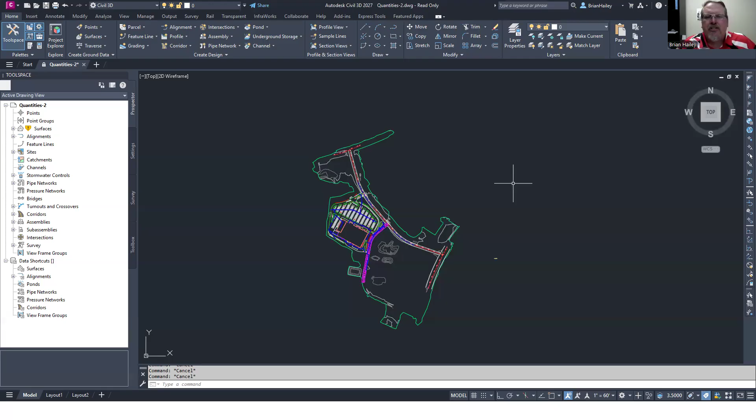Very nice. All right, so while we're waiting for the flood of questions to come in that you all have been thinking about over the last month that you wanted to ask me about, I always like to show off something new. So what I thought I would talk about today is double-click actions within AutoCAD. Now, this is an AutoCAD feature, but it works fantastic for Civil 3D.

Right now, there are certain objects that, most objects, if you double click on an object - so if I double click on the surface here, you'll notice it brings up just the AutoCAD properties. Well, most people that are using CAD all day long, every day, have their properties up on the second monitor or anchored somewhere. You don't need to bring up your properties all the time. I would much rather have it do something else.

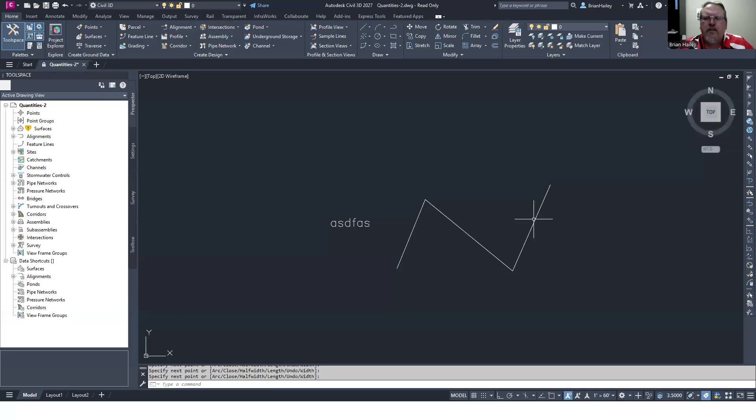And so some examples: if I put a piece of text in here, that's a small piece of text, all right, just whatever. If I double click this, it doesn't bring up the properties - what does it do? It brings up the text editor. Same thing, if you double click a block, it'll bring up the block editor. If the block has attributes, it'll bring up the enhanced attribute editor. This one a lot of people don't know: if you double click a polyline, it brings up the polyline edit command. So double clicking has different commands that get run depending upon the object that you double click.

And so what I want is when I double click on this surface, rather than bringing up the AutoCAD properties, I want it to run some other command. The one that I want it to do is bring up the surface properties. And the way this is done is by adding a double click action into your CUI. So I just type CUI at the command line - that's customized user interface, if anybody doesn't know.

And in your CUI, you have a double click action. So you can see right here, I've got all these double click actions. So right now, I don't have any double click actions. Now, this is the civil CUI file, and I do not recommend making changes to the civil CUI file, because when 28 comes out, it's going to have a new CUI file, and then you have to go in and add all your double click actions again.

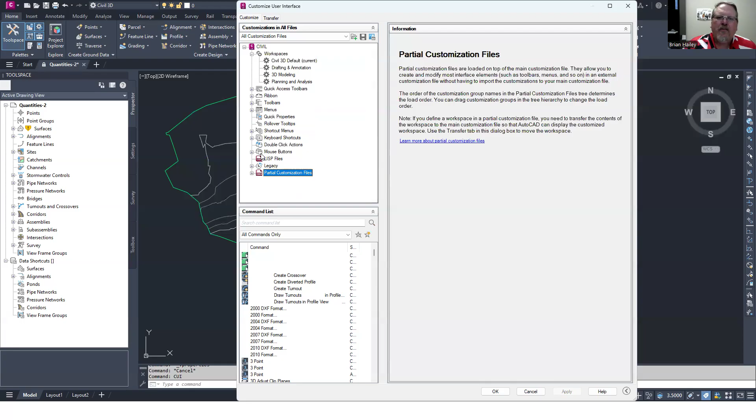Instead, what I recommend is creating a partial customization file and adding all of your personal stuff into that partial customization file. So if I right click on here, I can load a customization file. But for this, I'm just going to go ahead and edit the base one here. So if I right click on here, I can create a new double click action.

And basically the way this works is this is now a command, right? I'll just call this surface. So when I double click a surface, what do I want to have happen? Now, this is just something I can drag a command to. So I can take any command from down here and drag it to here. So I can come in here and find surface properties. I can take this, and I'll give you a tip.

If your list here is long, when you simply drag it up, as soon as you hit the edge of this box, it's going to start scrolling, which is really, really annoying. So a trick to avoid that is when you drag it out here to the side, come up, and then back over. And so now you can see this double click action for surface is set to surface properties.

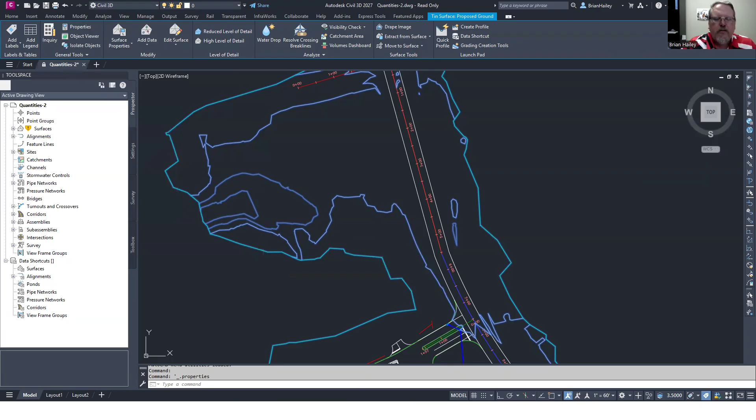So when I select OK, and I double click on the surface, what's going to happen? Yeah, it just brings up the AutoCAD properties. What the hell? Well, just because I named the double click action surface, it didn't know that it was going to be acting on a surface. If I go back in my CUI here, double click actions, surface. The object name is what you need to put in here.

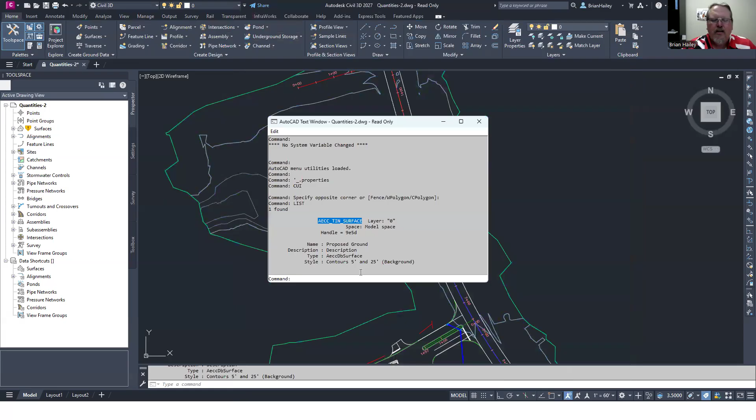So you need to figure out the name of the object to be able to run something. So how do I find this out? Let me just list it. I'm going to select a surface in my drawing, and I will list it. And as you can see right here, it says AECC TIN surface. I'm just going to copy it, go back into my CUI, double click actions for surface, and paste that in right there.

So that is the object: when I double click this object, I want to run this command. All right, so now when I double click my surface, it brings up my surface properties. Another good one is general notes. So if I go over here to annotate and I add in a general note, oops.

Most of the time, these general notes need to be edited. So how do we do that? Well, you select it, you right click, you edit label text, and then you're editing the label text. Well, you can do the same thing here. So let me list this. This is an AECC general note label. Copy that. CUI. Double click actions. New double click action. I'll call this one general note. Paste the object name in there.

Go find my edit. What is the name of that command? I can't remember the name of the command off the top of my head. Anybody know what that is? Maybe in this? No. Edit label text. There it is. Brian, you found it. Yeah, Chuck had typed it in.

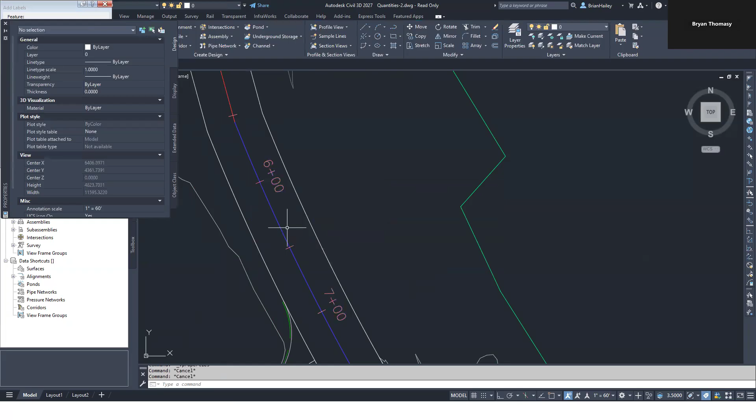But that would be a different command if it was, say, a manhole label. That would be a completely different portion. Right. So if I double click, for example, on this alignment label, it just brings up the AutoCAD properties. If you want it to bring up the edit label group, right?

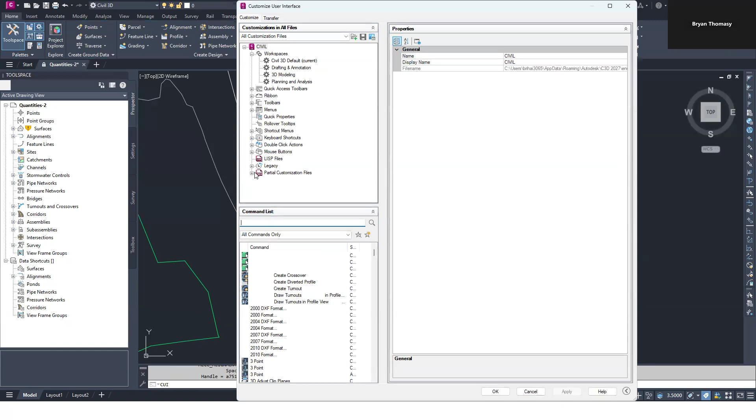So again, I'll select this, list it. Copy that. CUI. Double click actions, new double click action. This will be alignment station. Paste that sucker in. This one is add edit. No.

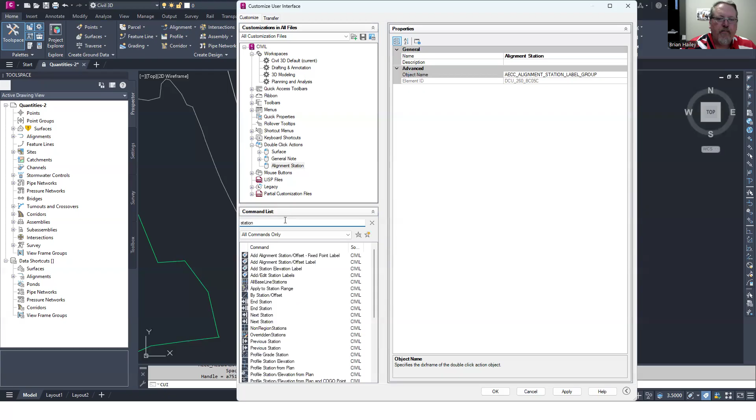It's something with station. Add edit station labels. That was the one. Drag that in there. Select OK. And now when I double click one of these labels, so I'll just double click this little tick here, it brings up the properties. Brian, shouldn't that have brought up the other thing?

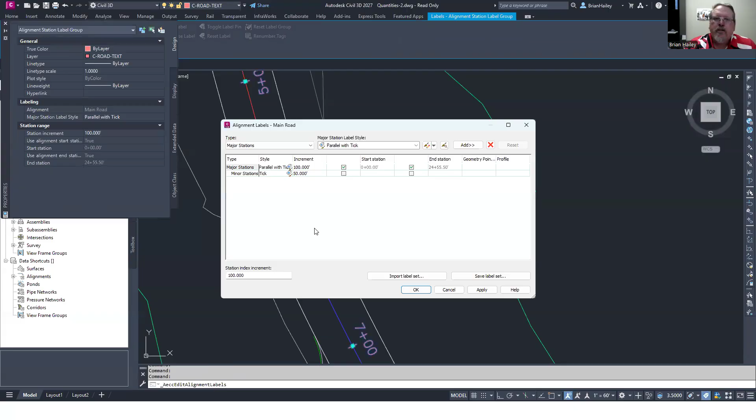Well, what happens if I double click this label? It does bring up the alignment labels, right? So what's the difference? Well, this is a major, this is a minor. So if I list this, you'll see this has minor station in the name. So if you're doing this for alignment and profile labels, you've got to figure out all the different types of labels that can be added to that and add those double click commands to all of them.

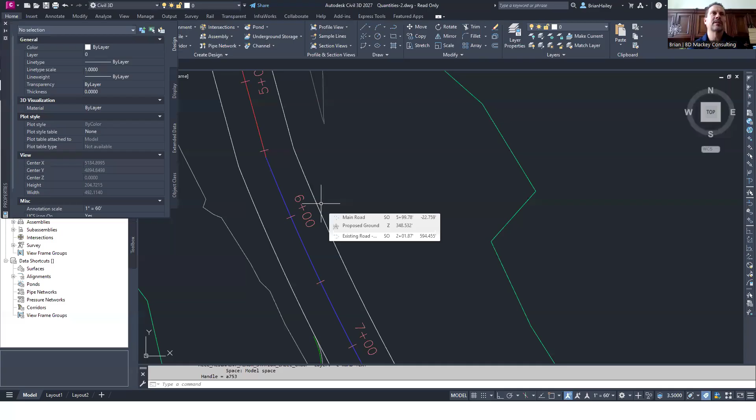So while you're in there, Robert asked a question, how does one make the edit label text box have readable text? Oh, yeah, that's a good one, right? Where's my general note? There it is. Readable text. Use Arial. Yeah. Well, first of all, don't use an SHX font, use a TrueType font. That's your first given. The other one is there's a Windows setting called

God, I haven't done this in years since we always use Arial. It's the, I can't even think of the name of it now. ClearType, thank you. I was gonna say Chuck put in ClearType. Yep. So if you come in here and you adjust the ClearType text, so you just go to Windows, type ClearType, adjust ClearType text.

Wow, this is different. Adjust ClearType text, and then turn off ClearType, and then just next, because it doesn't matter. We'll turn all of our monitors, sure. And since we turned it off, it doesn't matter which one looks best. And now you can see that's much easier to read. So it's something with the Windows ClearType that causes this issue.

But yeah, that's an annoying one. And now it's doing it for all my other monitors. There we go. Voila. Beautiful. Well, you do have some questions if you want to get into them. I'm going to do one more thing real quick.

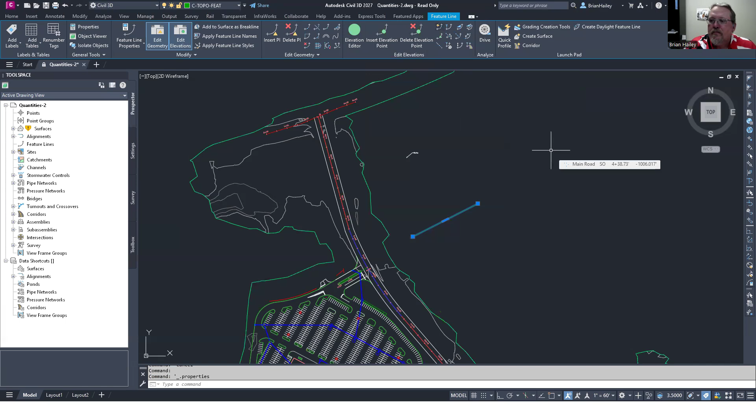Now you just need a triple click option so you could have either or. I think you could do a shift double click, right? Or something like that, maybe? You don't think so? I don't know. It just deselects it twice.

I know that there's like shift M commands and things like that or overrides. Man, Brian, are you going back to the old digitizer and the puck where the puck could have shift commands on the puck buttons? Well, to be honest, I'm on ACC so much, and the fact that they're archiving anything that's like Revit 2023 and below, you can't even put them on ACC anymore. I've threatened to go back to Bentley products.

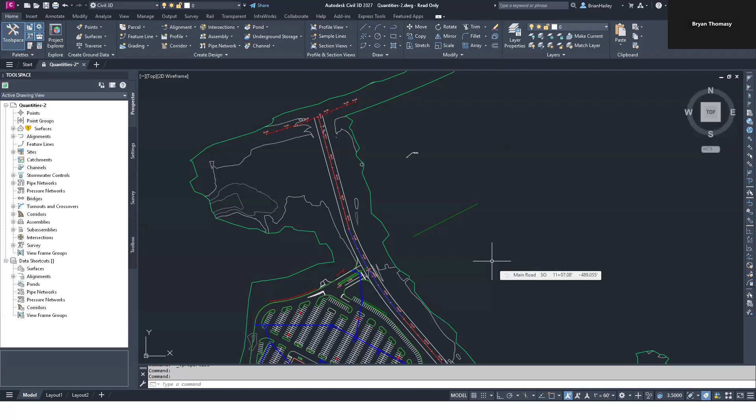And Chuck did ask, and being that you said you set up your company, I'm assuming this is a yes. Can the customization be added to the enterprise CUI? Yes. Yeah, and that's what I did. Here, let me come over to 2026. This is our GEI setup. So if I go into the CUI file here,

it's not the enterprise CUI, it's a partial customization file that's loaded into the CUI. So we've got our GEI menu here. And in here, I have all these double click actions. So these are the actions that I just put in recently. So if anybody wants to take a screenshot of those.

And these all bring up the properties of whatever object it is, except for the profile and alignment labels. That brings up the label editor, the label group stuff. And then the general note brings up the edit label text, and a feature line brings up the elevation editor.

Can you just export out the double click actions of that custom CUI so you could import it somewhere else? Not that I'm aware of. Just curious, wasn't a question anybody asked, just curiosity for me.

You could create a double click action CUI file, and the only thing you put in there are your double click actions. I do that with my function buttons too, they're preset to OSNAPs, overwriting F1, F3, F4, F5 and so on for snaps. That can be loaded separately, so that's all that exists in that CUI.

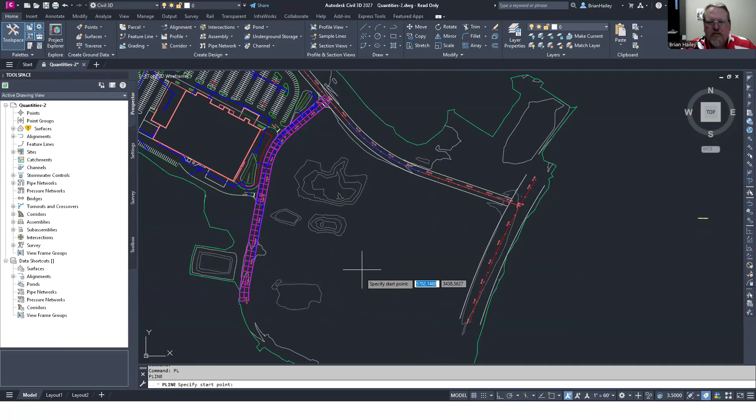So the easiest way to do that would just be stage storage. And make your contours like a tenth increment. So now if we come in here and do a stepped offset on this, let's set this to an elevation, we'll set it to 100 just because, and then we'll do a stepped offset on this.

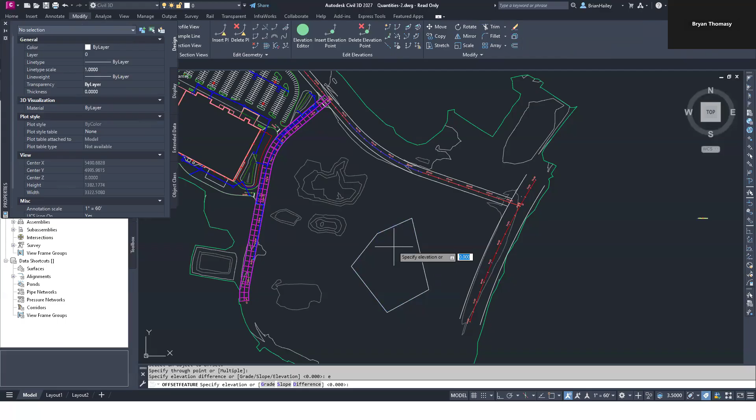Whoa, whoa, whoa, you're in Colorado, be careful. This data set's not in Colorado. Okay, see, we'll go through. I want the bottom of the pond to be about here, center of the pond, elevation of 85. All right, so super simple pond, right?

I need to turn that clear type back on, this is annoying. Give me just a moment, folks. All right, that's better, so let's go ahead.

Add these as break lines. Bada bing, bada boom, we have a nice surface here.

So there is a tool for this, where's that? It's under the Analyze tab, I believe, in the design pull down. And then under the design pull down, there we go: stage storage. This gives you the ability to create a stage storage calculation.

Basically, does it do an average end area or does it do the conic method? I can't remember, I think it does both, you get to choose. But I think it defaults to average. It defaults to both actually. Yeah, that's right, forgot about that.

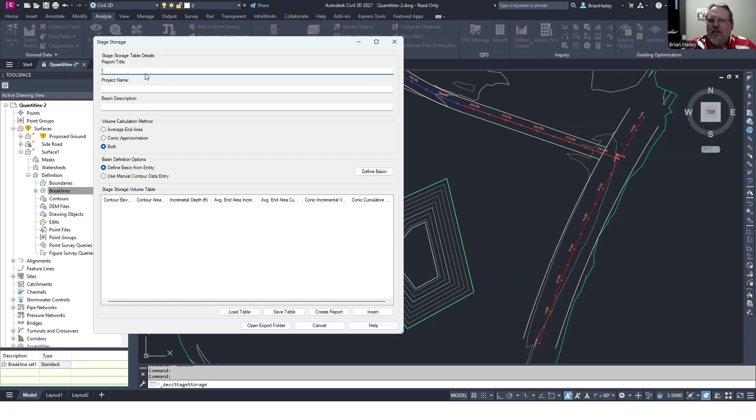I haven't played around with this in years, but I believe at least in older versions you had to put something in for the report title, project name, basin description, or sometimes it wouldn't work. I'm just going to throw something in there. I've never had to in the past. And before I'll extract the feature, I'll extract the contours first so I don't leave it up to the program, but I believe you can do it through here as well.

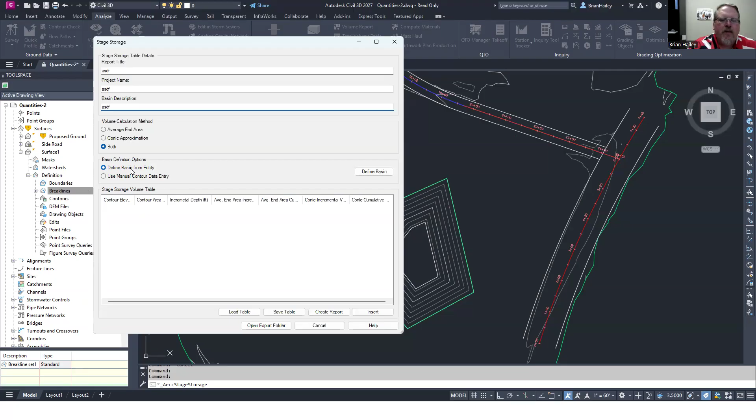So I'm going to define basin from entity, I'll choose define basin, and I'm going to define the basin from surface contours. Now as Brian said, if you extract your contours, you could define the basins from polylines. If you haven't extracted them, this will allow you to extract them right away, and it'll allow you to change the selected entities to the following layer, and put whatever you want in front of the layer for the polylines it extracted, and then you can have it delete the unselected entities on selected layers.

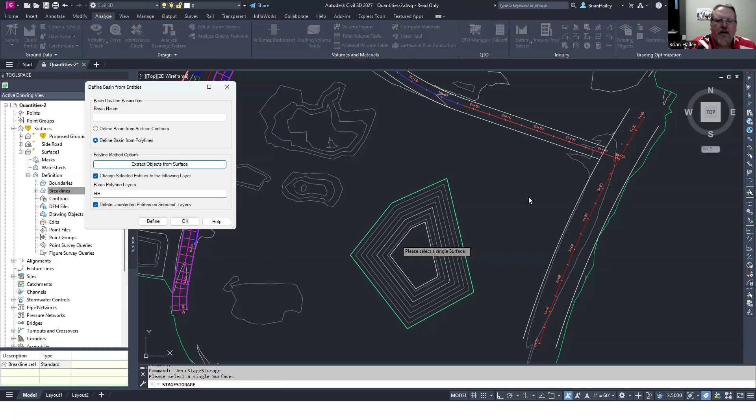So I'm going to go through this: I'll choose extract objects from surface, select the surface, and that just extracted all those contours. Then I'll choose define, and I'm just going to choose these here because I don't want to go all the way up to the top. All right, and it shows all this wonderful content down here.

And then you can take this, put it into Excel, do a calculation to find out at this particular volume I need, it's going to be at this elevation. There's nothing really automated in Civil 3D, at least not that I'm aware of, but I do want to show you this here real quick.

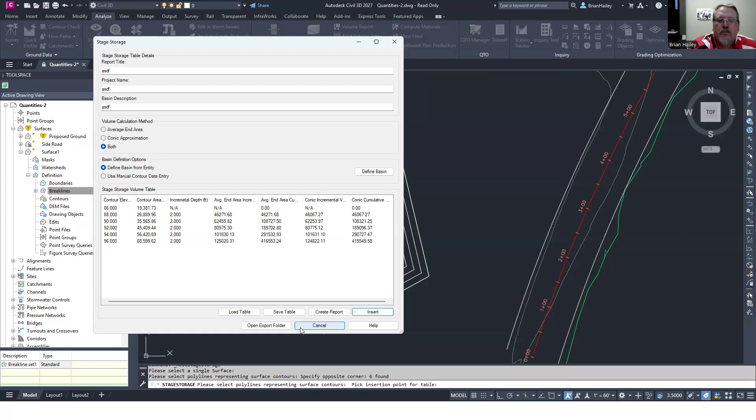So you can then load the table, save it, create a report, or insert it. If I choose insert, it'll insert it into the drawing for me. This is just an AutoCAD table, not dynamic in any way, but the data's there.

Remember I toggled on that option to delete the unselected objects, like that one and that one? It didn't delete them. So that didn't work. And remember when I said it's going to put the prefix on the layer name? It just used the prefix, it didn't actually use it as a prefix. So it did exactly what you asked it to do.

But that's one way of doing it - oh, I don't want to delete that, let me just get rid of you. There we go. So this is how you can go about doing that, Robert.

The other thing you could do is, if you really wanted to, create a level surface and then do a volume comparison between the volume of your pond and the level surface, and move that up and down until you get to a specific volume that you need, then find out what the elevation of that is. But I think this might be a little bit easier.

We'll use both, but for the stage storage to show the freeboard and everything like that, that's one of the easier ways to do it. That way you can go all the way to the top of the pond and see what it is with various freeboard.

Hopefully that answered your question, Robert. Sort of - do you want to come off mute and ask a little bit better? You can do that if you like. Do I have to do that for you? I just did it. Thank you. So if you'd like to, yeah, we can hear you.

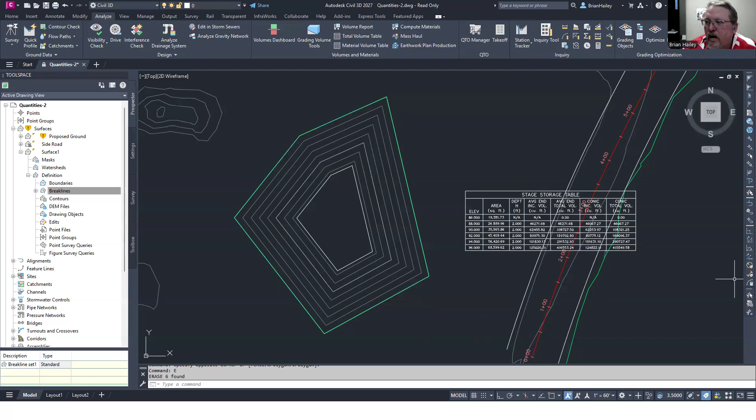My users - we have, like I said, the existing TIN surface with a depression area for a pond that's way larger than what they need. And they wanted to know at 2 acre feet, what was the elevation going to be? So I'm kind of curious about Max's comment there - make a pond from the surface and then use that pond for volumes.

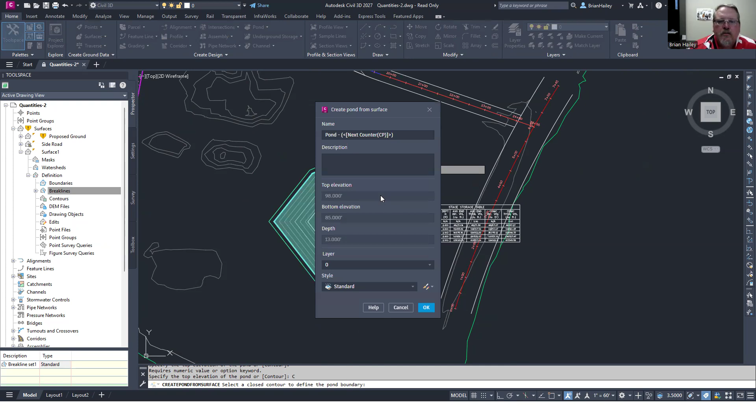I wonder if there's something in the new pond tools. Let's go to pond, create pond from surface. Let's choose contour - so that's the top of the pond there. Okay, so we have a pond.

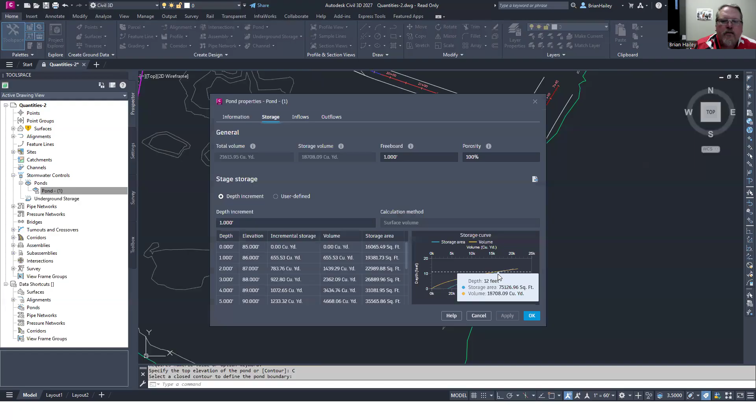It's gotta be over here somewhere - stormwater controls, ponds, properties. Is there anything? Storage. So we've got a chart over here. Can we make this bigger? There we go. So this actually is a lot easier.

And then you can come over here and say, okay, at this - so we've got volume, we got storage area. Unfortunately it doesn't let us go across the volume, but it's the same concept. It's not going to give you the elevation at a specific volume - you'll just have to do an interpolation between two different elevations or volumes, and then it'll tell you what the elevation is between them. Yeah, very much, okay, thank you.

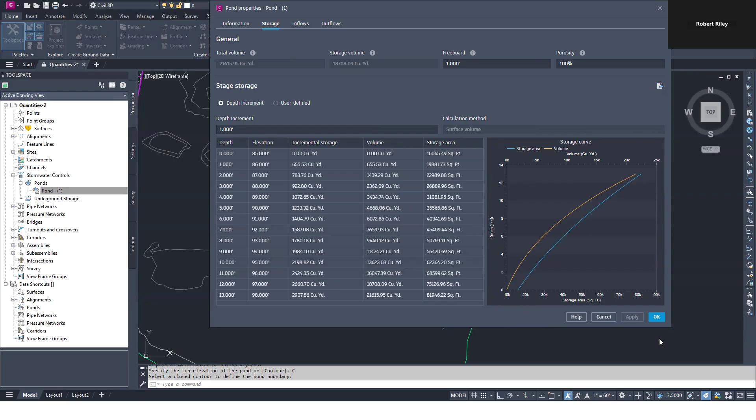There's a couple of comments in the chat about user-defined contours. So let's say that the elevation ends up being - what's the bottom of this? I'd say 85. Let's say that the volume needs to be 91.73. You can go into your surface properties, go to the analysis, and do a user-defined contour analysis. We're just going to do one elevation and set that to whatever you want it to be, 91.73.

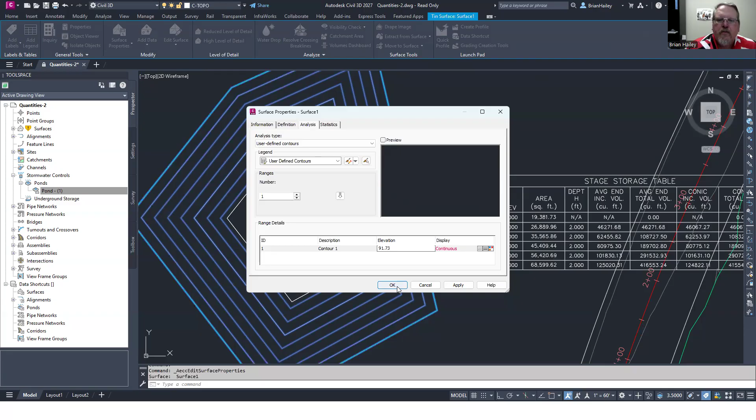I can type - there we go. And now we have a contour at 91.73. Now we don't see it right now because of this particular surface style, so if I go edit the surface style here - and you shouldn't do this, you should just go copy the style and create a new one or choose the correct style - user-defined contours is turned off, so I'll turn that on. It's going to be orange, and there is that 91.73 contour. So that would be the elevation at that particular volume.

That seems like all the follow-ups. So cool.

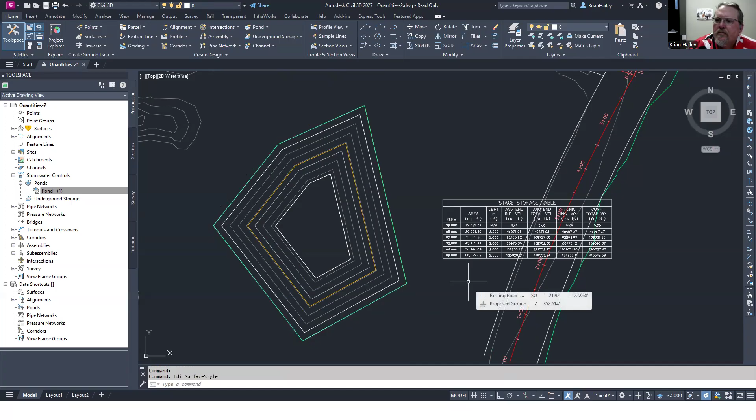So then Alex asks, can you go over the process for getting a Civil 3D surface into Revit to show Toposolids in Revit? Yeah, for sure. Actually I was just gonna test that on a drawing that I had. Do I still have that open? I don't.

Somebody came to me and said, hey, we're having issues with this particular surface bringing it into Revit. So I was going to test it, but then this came up. Let's go ahead and try it here.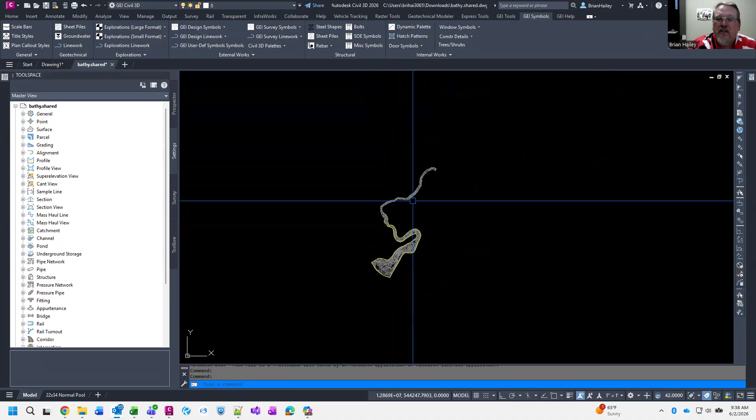Come on, finish opening, please. There we go. All right, so it's a fairly large surface. That might be what their problem is. Let's check out the statistics on this thing.

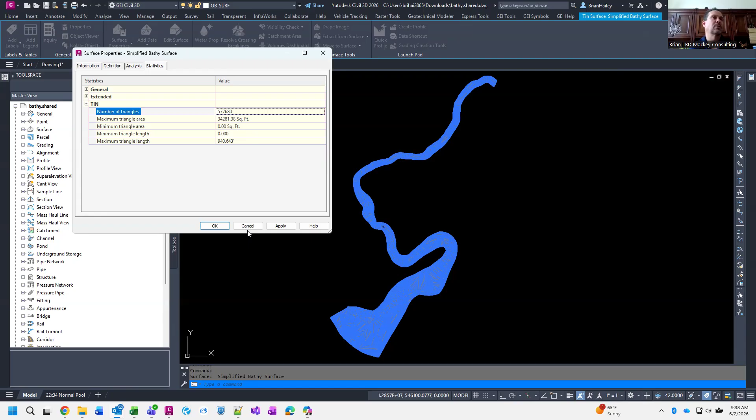577,680 triangles. That's not too much for Revit, is it, Brian? No, it's not going to be too much. It's definitely going to slow it down a little bit, but it's not going to be too much. Multiply that by 3, and that's how many points you'll have, right?

I guess we can look at how many points we have. Oh, why am I selecting this? I can just double click this. All right. Oh, there must have been a polyline over there. All right.

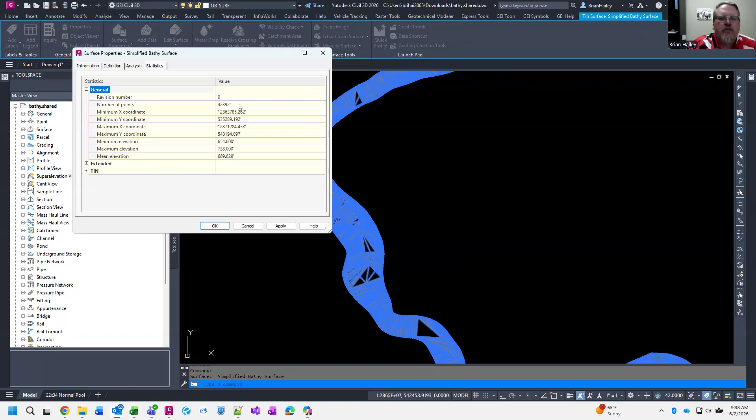424,000 points. All right. So basically what I'm going to do is, first thing I need to do is save this up to Forma. And I'll just save it here, and I'm just going to call this bathy.

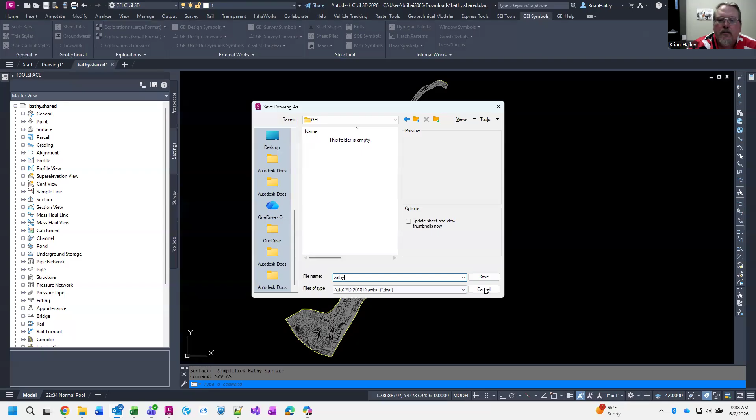For those that may not know, bathy is short for bathymetric. This is the terrain underneath a reservoir. All right, so this is part of the project.

So then we'll go to, is it output? Publish surfaces. This is done through Forma, formerly known as ACC, Autodesk Construction Cloud. All right, select the output file. I'll go ahead and browse for that.

So I'll just call it, throw it in here, same place I put the other one. And you'll notice it adds this dot shared onto it. I'll go ahead and save that.

One of the things it will do, it won't in this case because it's already done that way, is it will change the display so it displays triangles. I don't know why it does that. So if you get a message saying the style needs to display triangles, just hit OK, and you should be good to go here.

So let me go ahead and, do I even have Revit installed anymore? I got 2026. We'll go on with that.

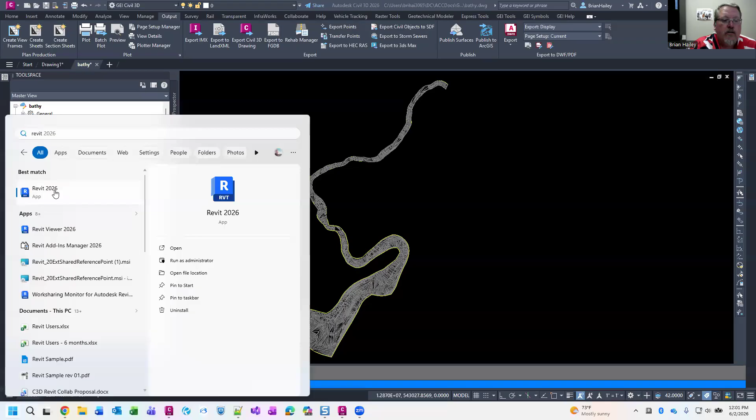And Mackey, you might need to help me a little bit with this part. Yep, I assumed.

So the nice part about this is you are doing this on Forma, but that does mean the project has to be on Forma to do this step. If you guys are just sharing files back and forth, downloading them, you are not on the Autodesk cloud service, then you're just going to have to export that triangulated surface.

And I do want to say that's the big thing, because Revit will do much better getting a TIN surface than contour lines. The reason why Brian and I always like to explain this is you guys are generating contour lines off of points. Revit's taking those contour lines, regenerating its version of where the point should be, then creating its topo solid from those points. So it's an interpretation of an interpretation, right?

It's kind of like if somebody were to take something you were doing and translate it from English to German to Spanish back to English, there's going to be some stuff lost in the translation. That is absolutely going to happen. So if you can give your Revit people a TIN surface, that is one of the best things you can do.

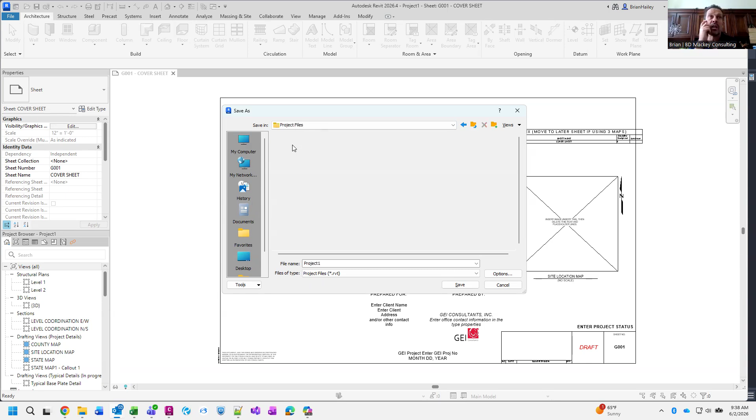So I'm just going to save this Revit model in that same location. And then let's see, there's the doghouse thing. There it is. So I'm looking at the model here.

And then in here, is it under insert? It's under massing and site. 3D, right. Thank you. Topo solid.

Create from import. Actually, sorry, no, you're right, it's under insert because you're linking this. I was doing it the other one, my brain was still in the previous one.

Link topography, it's the fifth button from the left. There it is, link topography. It's the one that looks like a contour map, duh. Sometimes they get their icons good.

All right, and then I'll choose that surface and link it in. And assuming that my users were just making a mistake somewhere and doing this wrong, it should come in here.

Yes, but you are not going to see it currently in the view because you guys are in Civil 3D where your 0,0 in AutoCAD is the Revit's origin, so you're going to be 600 miles away. Yeah, I should have done the shared reference point first time. It's fine.

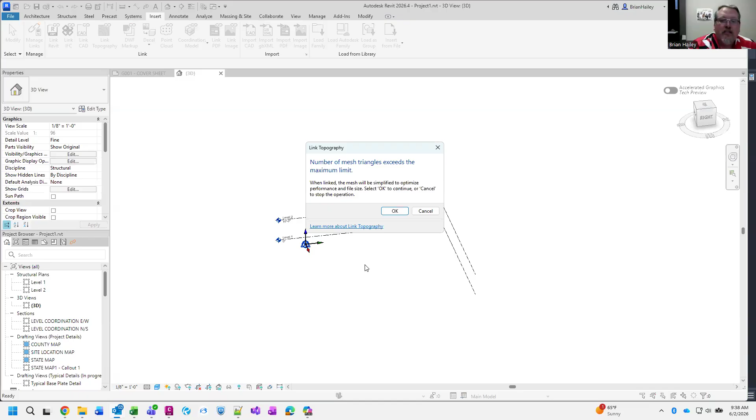But that's the process. Number of mesh triangles exceeds the maximum limit. And okay, it's going to simplify it.

Yeah, I was wondering how many. I don't remember what the limit is on the triangles.

Where this really works, if you're all in the same Forma project, even if you're not working in Forma as the civil engineers, you can still be invited to the project and only put this up there. That's one of the things you can do.

The other thing is usually your architects are going to ask for your DWGs as well. The big thing I always tell people is make sure you export to AutoCAD. Don't just put up your Civil 3D file, because there's all these Civil 3D tools that Revit just does not understand. It will freak out, we will miss things, and people are always like, well, you're not displaying it properly. No, the civil engineer did not export to AutoCAD so Revit can understand it.

Only give the Revit users what they need for their model. If they just need the site layout showing where the parking lot's going to be, create a drawing that has just that in it and send that to them.

I got one yesterday where there were like 6,000 points, which I could see in AutoCAD, but once I brought those into Revit I couldn't see them because those were AEC, Civil 3D Cogo points. Revit doesn't see those. So in AutoCAD I can see all this cool stuff, but once I brought it into Revit I was like, well, that's good, I didn't want to see all those anyway because it was from a surveyor - it was the edges of every parking stripe, everything. I did not need to see those 6,000 things, I'm glad they did not come in. But again, those Cogo points Revit will not recognize.

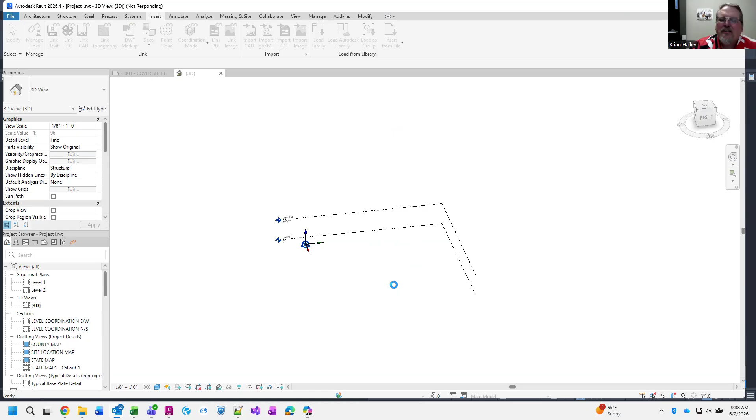Hence the export to AutoCAD. Yeah, I should have done this with a much smaller surface, but this is the idea.

Is that still the same case, Brian? I believe you can still cut things out of it with the tools, but you can't go edit it. Revit is always notorious for - you bring in a surface and all of a sudden you get these crazy mountainous spikes because it interpreted something wrong. If it's something I just imported, I could go delete those points, but if it's linked in, those points just stay. So that's one of those things as well.

Hey Brian, you see the chat? You should do one of these for Revit. I was just going to say, Robert, right after this I will post the link - right after this we do Revit Radio. Well, Brian ditches me because I have actual Revit people who help me too, but we do have Revit Radio where you can ask all your Revit questions. Is that like Radio Free Europe? Well, for those of us who are old and listen to a lot of NPR, originally when I set this up 20 years ago with Stan, one of Brian and I's former coworkers, we based it kind of like off of Car Talk. It's not professional, we're totally out there, that's just kind of what we do. But we record these now so we got to be a little more even keeled. No, I'm still not even keel. Yeah, okay.

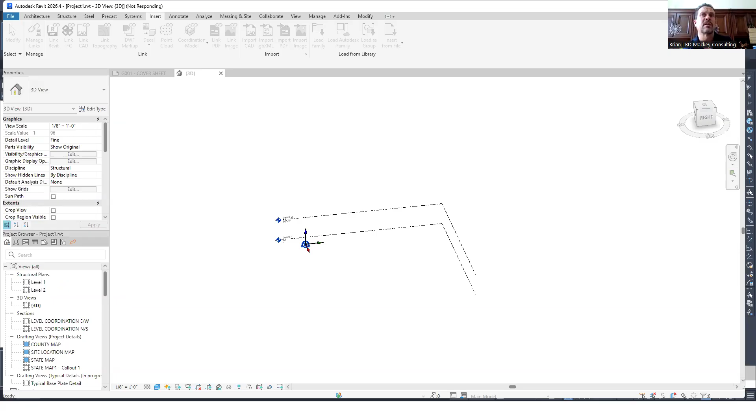And then the only other thing with that said is when you re-export out your TIN surface like that again, and then it's put on Forma, Revit will see that next time somebody opens Revit, it will see that changed and it will update it in the Revit interface. A lot of the architects, again, not necessarily liking that because if it does update, it can freak out any holes or anything like that they had put in there. So, right. But it is a link, so it makes sense that it would update. Yep, absolutely. I just always like to point that out. Good call. All right, what do we got next?

Okay, Robert asks, with a pressure pipe run that is lowered and raised to go under a crossing object in a straight line, how does one convert the pipe run to a lowering that comes back up with 2 rolled 45s to form a 90-degree turn? He attempted to diagram it in the question. Yeah. I was looking at it like, what is that? Okay.

I thought he pasted an image in, but I'm realizing that Robert actually went in and did like colon, tab, tab, tab, tab, colon. Good job, Robert. I like it.

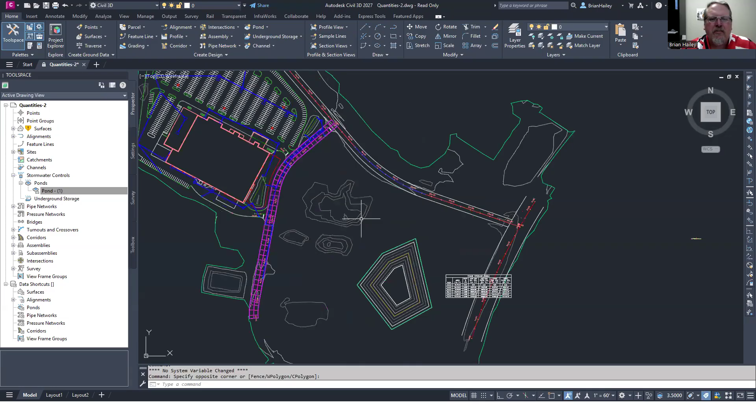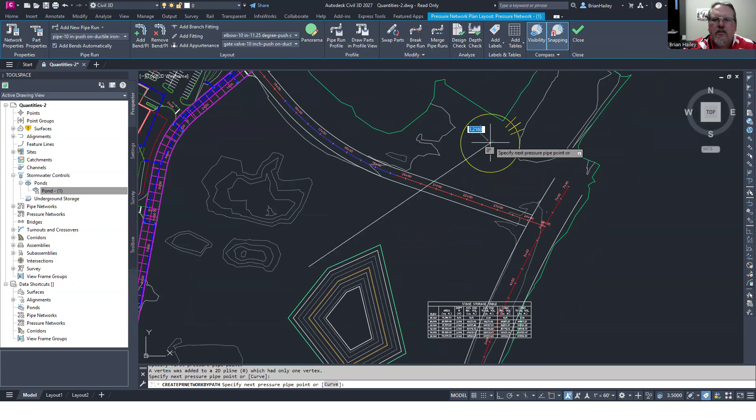All right. So pressure pipes. So let me create a network here real quick. Pipe network, pressure network creation tools, reference surface. We'll use the proposed ground in this drawing. 3 feet of cover, sure. And I'll just throw something in here real quick. All right, so this is not a very good drawing for this. Pressure network parts list. Yeah, we got 11 1/4 degree bends in this drawing. That's it. Okay, we're gonna have to go somewhere else.

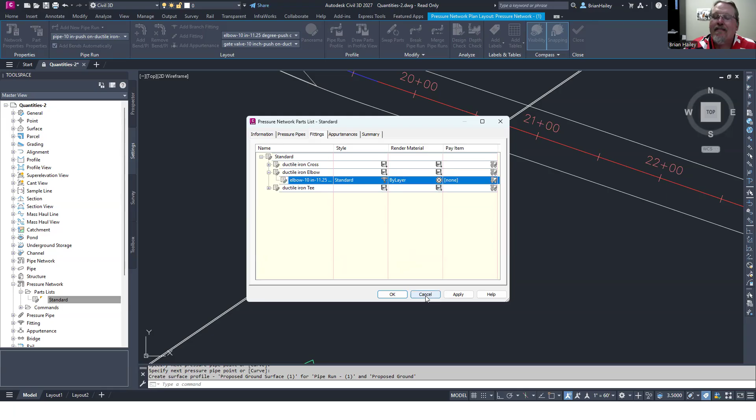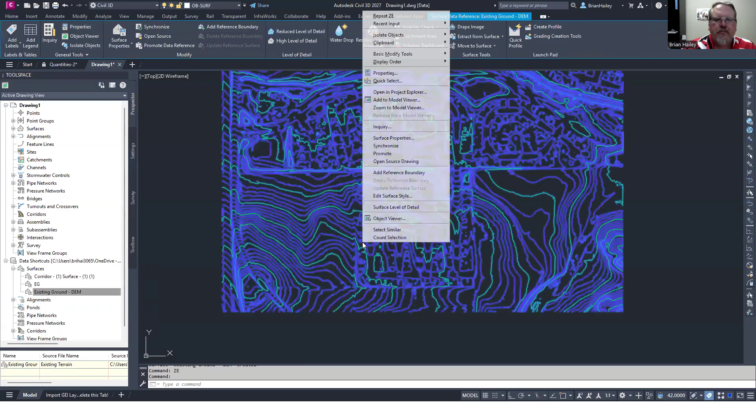Let's see. Let's go to ours. Export common. And then I'll bring in a surface real quick. Set working folder. Actually, that should work. I could have double clicked it. It's going to take a while to get used to. Let's see. Let's do survey 2 and 10. Okay, perfect. All right. So I'm just going to come over here, create a quick pressure network.

Let's do 8-inch pipe. Reference surface will be that one. Up here, something like this. Interesting. Didn't work. Add a new pipe run. What did I break?

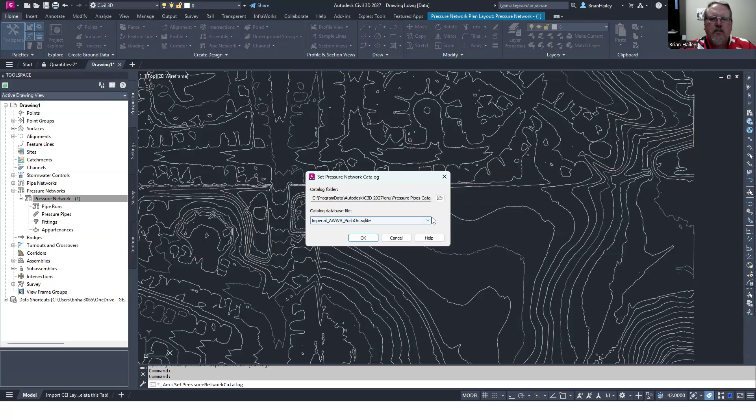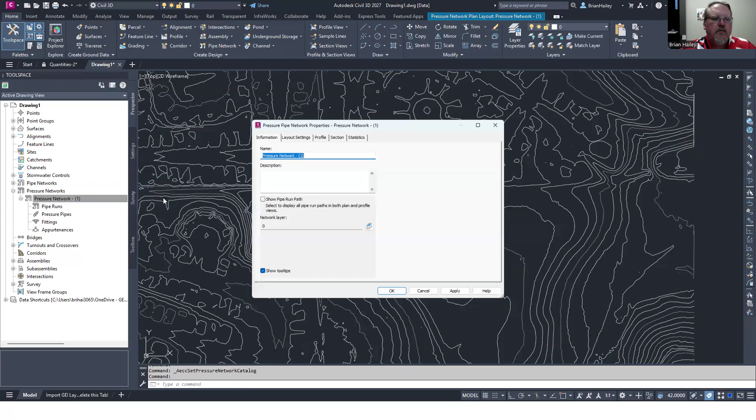It's not pointing to our catalog. I haven't set 27 up for GEI yet, so that's what's going on here. CAD support. Common. New pressure pipes catalog. Imperial. There we go. Add a pipe run. Let's try this one more time. Still failed.

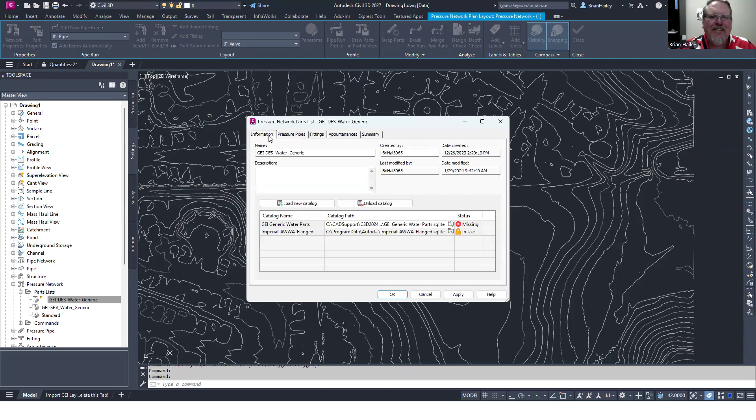I wish there was a tutorial file that had pressure networks in it, so I don't have to do this every time. I guess that means you just need to try to get yourself hired on with Autodesk to do that. That's why there's an amazing Revit structure sample project in Snowdon Towers for Revit. Right? Because I was looking for that one.

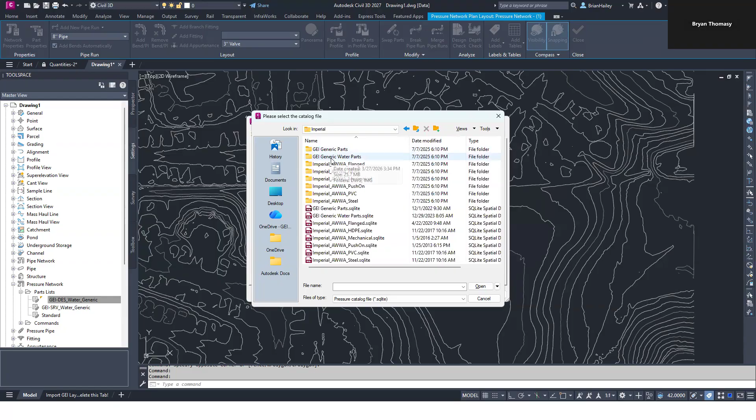Let's take you to CAD support. What was that? GEI generic water parts. I think I want to choose that. Okay. Now it should work, yes, reluctantly. Hey, look at that. We got stuff. Awesome.

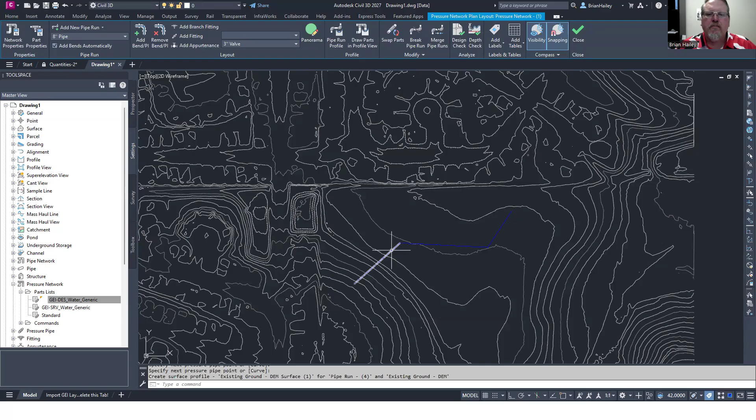All right. So then we will do a pipe run profile. We'll do offsets at bends. We'll do a new profile view, create profile view. And there it is. All right. So there's my pipe. And really, this is just a profile. So if you want to do a lowering, let's say, for example, I had a pipe here that I needed to go under, right? Let's put it a little bit closer. Let's just say it's like right there. And I need to go under this. What I would do is I would just draw in my crossing where I want it to be.

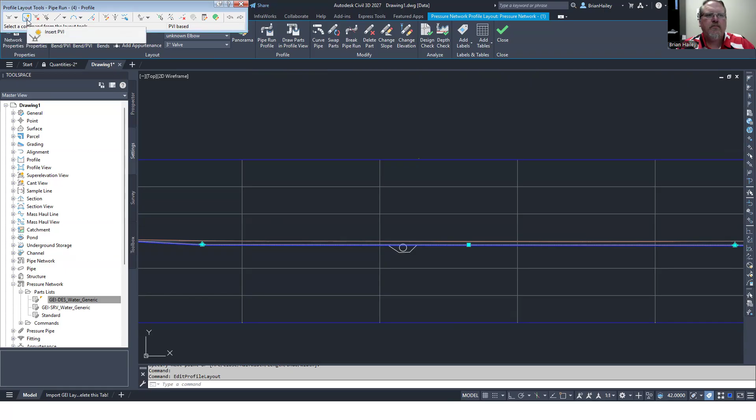And then because this is just a profile, we don't have multifunctions here. I can go into edit profile geometry and then just insert PVIs. I want to insert a PVI there, one there, one there, and one there. And why did that update? I should have updated my profile. Oh, and then I have to, where is it? It's the overrides. Somewhere in here.

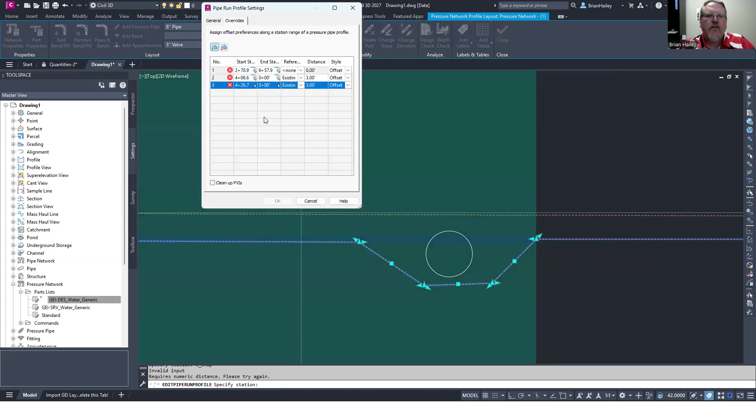Pipe run profile, overrides. So right now what it's doing is at each PVI, it's calculating the elevation. So what I need to do is come in here and add an override that starts there. And then another one that goes to there. And then this will reference the existing ground. And this will be cut length. Maybe, I don't know.

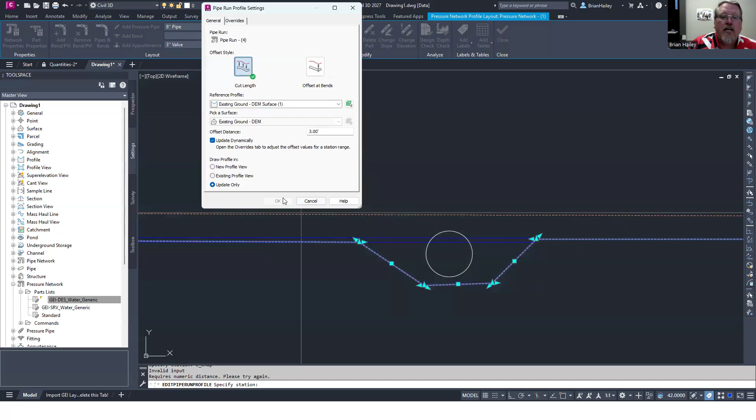I'm missing something, but this is the idea that I've done in the past. I haven't done this in quite a while. Maybe if we set that to cut length. I'm not even getting the OK option here anymore. I'm doing something wrong.

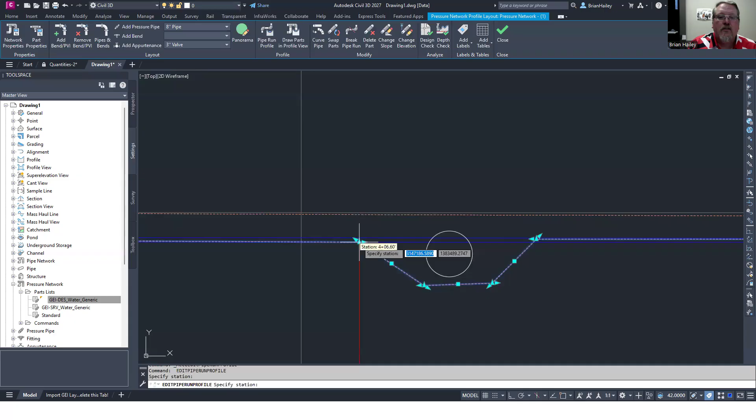So I change that to cut length. Still think it's something with the overrides. Yeah, as soon as I add an override, oh, because the start station, this needs to end here. This one needs to start there. And I'm still not okay. On that one needs to end there. All right, and then I need to add another one.

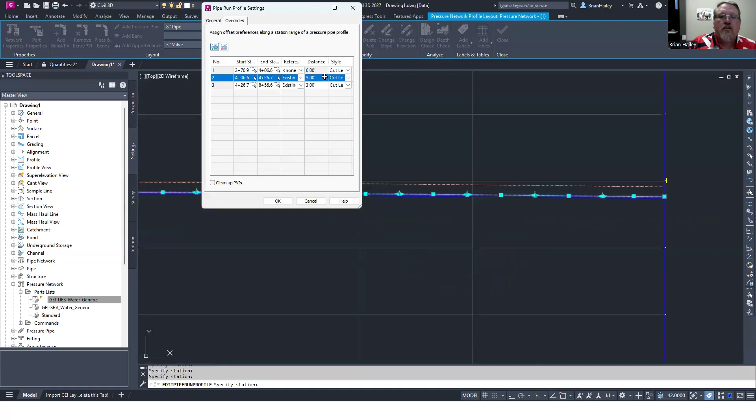Robert says cut length works when the profile is created. And then this should end at the end. And then this one should be distance. This one should reference the existing ground, and this one should reference nothing. Maybe? Yeah, there we go.

So Robert, hopefully that answers your question. Right. So basically, let me refresh. So you can add the PVIs in there, and so that edits the profile of the pipe. But the problem is in the pipe run, it was set to offsets at bends, and I didn't have bends. So I changed this to cut length, and then I added some bends in here. And then in the overrides, I set 3 regions.

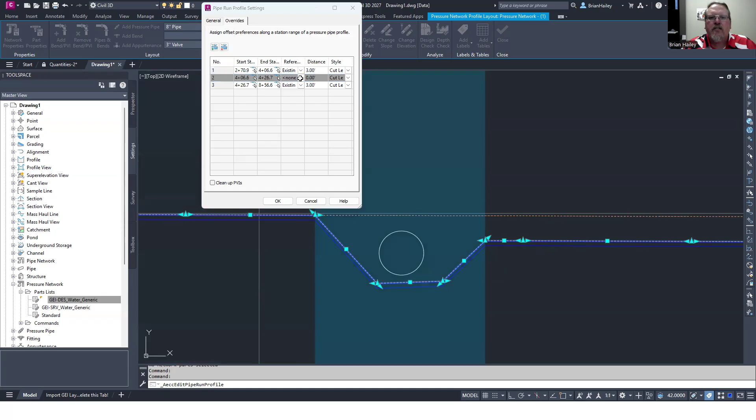So the first region was before the lowering. The second region was in the location of the lowering, and the third region was after the lowering. And so after the lowering, it was set to 3 foot of fill, and it should have been 3 foot of bury depth before and after. And in the middle, we changed that to, instead of referencing existing, just to be none. So it'll just use whatever elevations I put on the PVIs. And there's our lowering.

Did that answer the question, Robert? No, he says he makes the parts that come up a pair of 45 bends, so it forms a 90. So we need to do 2 45s to do a 90. Yeah, so there's a 45 there and a 45 there. So we come over, up, and over.

So I can't see myself, but assuming these pipes are the bends. So this is, here, you don't want it to come straight up. You want it to roll down this way. Correct. So you still want this to be a 45-degree bend, but you want it rolled that way. Exactly. Gotcha.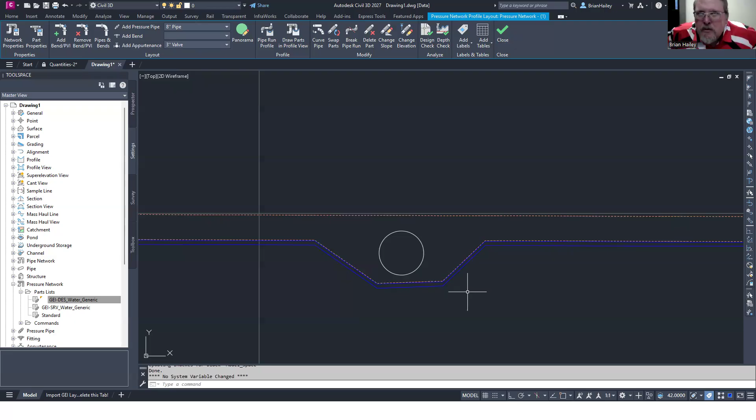So, yeah. But I have seen T's or bends that have rolled. So if you have a horizontal 45-degree bend or whatever the angle happens to be, and you put a PVI there in your profile, it should come up at that angle. But you have to make sure that you've got a PI, a point of intersection in your plan at that location. And then if you come up at a different angle, different elevations, it should roll that fitting for you. Now, a T, I don't think it will do that, but the elbows should. But it's something that's tricky.

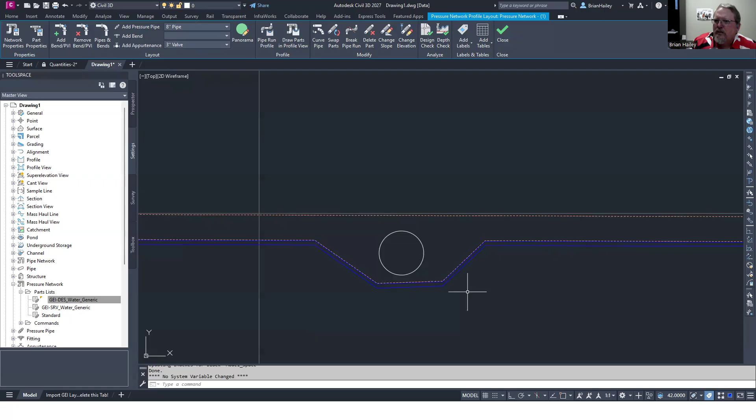For sure. Yeah, it's funny. All modeling programs like that, like even structural programs where I've got a rebar, I've got to have a hook length, but it doesn't fit, so I want to rotate it in plan. But the program's like, no, I want to be perpendicular to the object. And yeah, a lot of programs have issues trying to figure that out.

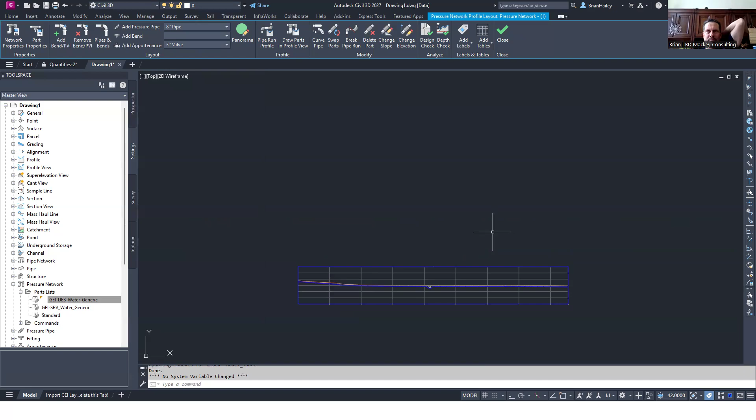Yeah, so let's see, let's get in here Robert where I said the PVIs in there, but Civil 3D was not adding the 45-degree bends. So if I just, there we go. Why is it not letting me add it?

I'm having some serious issues here. Let's see if I come in here. Can I just copy this?

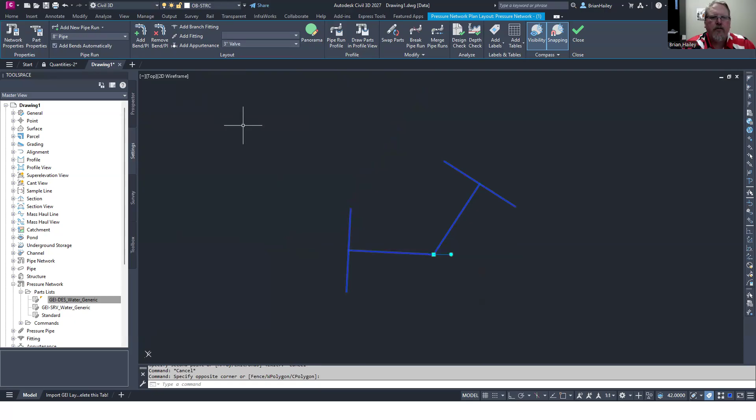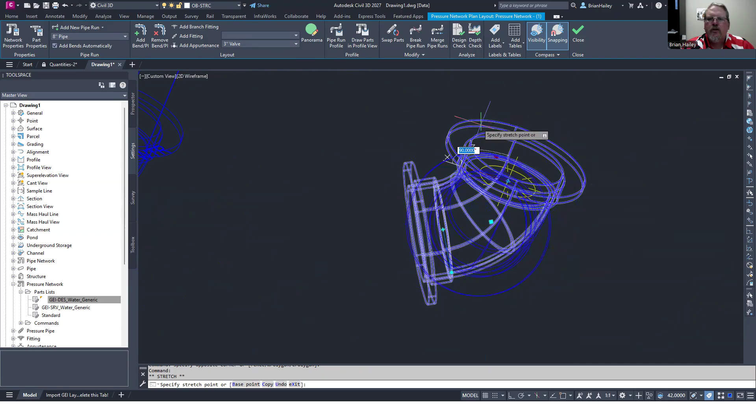Okay, it's kind of hard to see here, but if I go into a 3D view here, let's move this over here. When I select my fitting, you'll see there's a little circular grip here, and there's a circular grip here. That allows you to rotate the fitting around that axis. So you can come in here and rotate that fitting to whatever you want it to be, and then you can draw a pipe off the end of that.

Let's change the visual style. Oh, that was useless. That did not work.

Robert's like, oh, that's what he was missing, that little grip. Yeah.

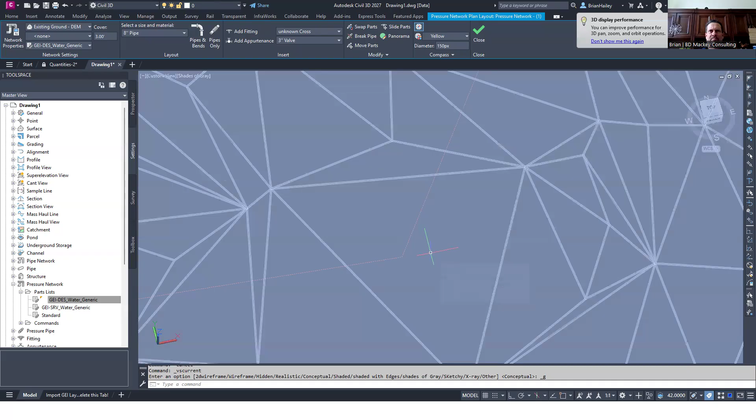But anyways, so you can rotate that around and you get that at both ends. I wonder if a T has that too. But apparently I can't put any T's in this particular drawing. But hopefully that helps, Robert. That might have been what you're missing.

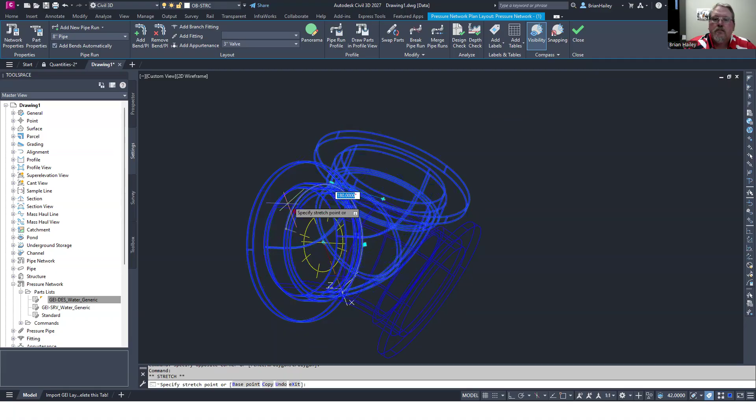And then this compass snapping, if you turn that off, you might be able to, no, it still does the snapping there. You can, there's a place where you can change how often it snaps, and I can't seem to find that right now. You could also type that angle in too. You can rotate that around.

So, all right. What else we got, Brian? All right, got 5 minutes left. Sean has a question. Please show how we can eliminate the default drawing number 1 when we launch Civil 3D. Do you remember how to do that, Brian? Say that again. So when you launch CAD, it creates drawing 1. It's something with startup. I don't know. I don't really utilize that.

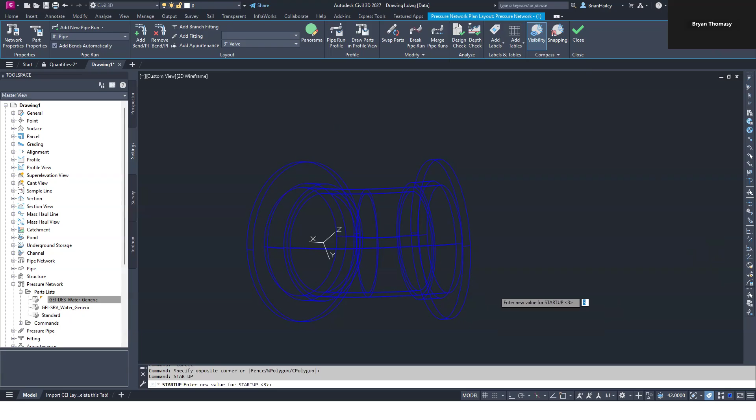I don't know if it's in the startup or if you actually go into your options for new or QNEW, and you can set it to a specific template. Yeah, you can set it to a specific template for sure. But if you don't want a drawing and you just want to go to an existing drawing and not have drawing 1, it's the STARTUP system variable. So right now it's set to 3. The startup tab is displayed and the ribbon is preloaded when you open or create a new drawing.

Well, Jason had put in there, he thought it was STARTMODE, not STARTUP. Start mode. Then he deleted it. Yeah. I don't know. Let's go ask AI. That's the start tab. That's the Autodesk... Where'd you go? It's up in the, oh, you turned it on and now it's somewhere.

Yeah, my CAD is frozen. Maybe AI didn't want to come out and play. All right, well, while you're trying to get your AI to come up, here's one we can all answer that doesn't need you to be in Revit.

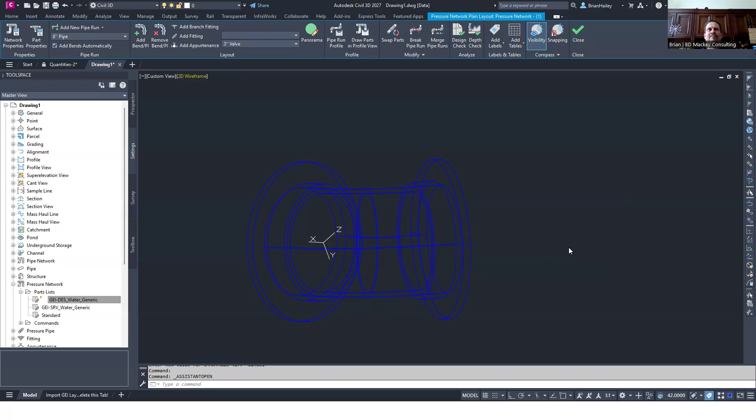STARTUP equals 2 is what Dennis says. Startup. Okay. So the one here is, has anyone been using the scheduled updates with the Autodesk Access app?

Oh, you got it to come up. There you go. Has anyone been using the... I was just trying to buy time while you were waiting for your Civil 3D. Well, yeah, that was 27. It's still frozen. Oh, okay. So this is 26. So I just switched over here.

Do you have the Autodesk AI Assistant in 26 as well? Well, yeah, you have the Autodesk Assistant, but it's not AI. Oh, got it. Yeah, it is AI, but they've made some changes in 27. Got it. Well, let's ask it. How do I set up CAD so that it doesn't create drawing one when I launch? See if it can answer that one.

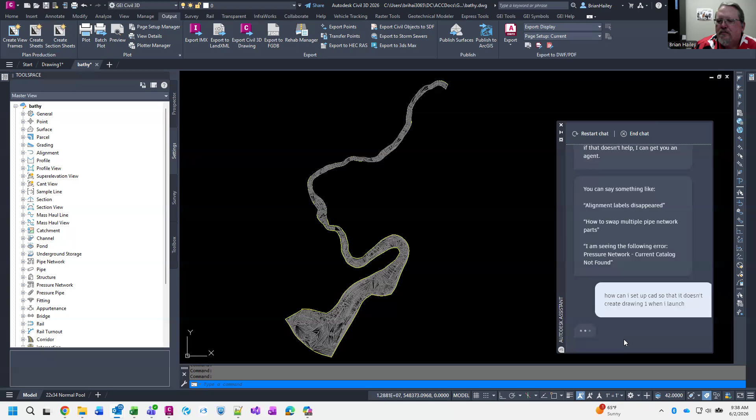Well, you can just have it set so it goes to the start menu, right? Because that's what we have ours as. We put in none for the QNEW. So that way when it starts up, it starts off with just the start menu only. All right. Not very elegant.

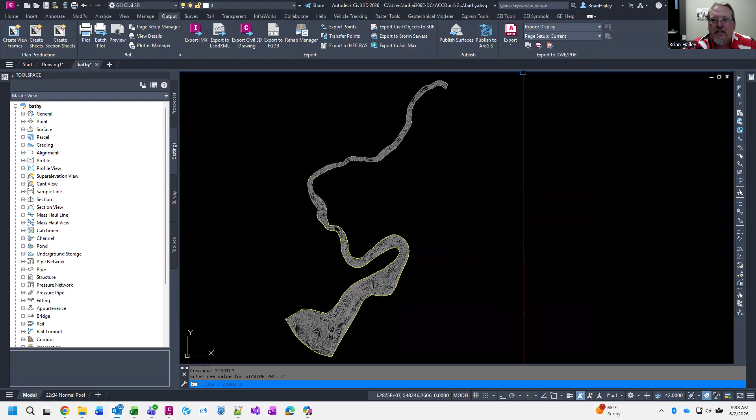So for folks that don't know, if you're going into a system variable and you don't know what the values can be, when it's asking you to input a number, if you hit F1, it'll bring you to the help for that particular system variable. Yeah, so looks like if you set it to 1, so if I set this to 2, the only problem is this might be set in our Lisp, our acaddoc.lsp, but I might set it back to 3 for me. And then I go launch it again.

Okay, well, that's launching. Oh, no, you're pretty quick. Revit takes forever to open. Yeah, there you go. Startup, set it to 2. Cool. Wow, you got a lot of recents, don't you? Yeah.

Do you guys got multiple offices throughout the United States? Oh, yeah. Because our company, we work out of multiple offices. So a person may go to an office that's on the other side of the United States. And with all the recents, AutoCAD's actually got to do a search for those things. So I'm telling our people, if you want your AutoCAD to launch faster, you can reduce the number of recents, so that way it doesn't have to do all that searching. Yeah, for sure.

Another thing you can do is you can pin them. So if you notice, I've pinned this one here. If you hit the little pin symbol, it'll always stay on your recents in the top left. So for those ones that you're always going back to, you can pin them. That's really handy too. The reason I say that is because I think AutoCAD defaults to 50. No, no system variable for recent.

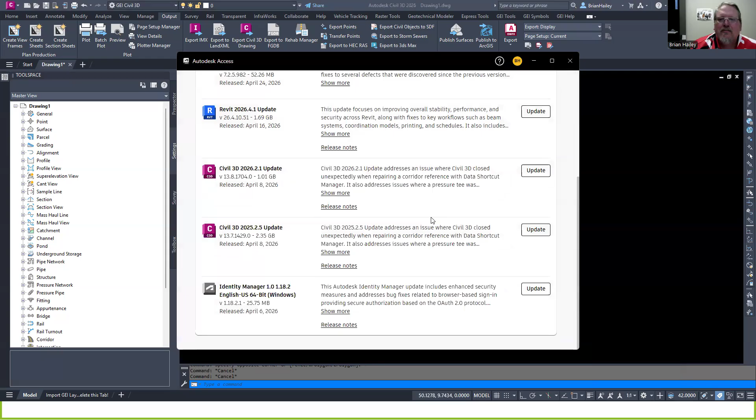I'll use Desktop Connector as an example. They don't do that. No, they're making it sound like there's a feature in there I didn't know about, that you could tell it to schedule it for everybody or something. And I'm like, the full admin access is me and Desiree, and I don't see that in my Access. Yeah, it's not something I'm aware of.

I did see one from Quinn that I think is an easy one to answer. What are your thoughts on the feature line styles? Are they needed? My personal opinion, no, they're not needed at all. At least not for feature lines that you're working on in your drawing, right? I don't have to have styles for my polylines. I just use layers to control how they're displayed. And so I do the same thing with my feature lines when I'm doing grading and stuff. Now, if they're in a corridor, I can see having styles for feature lines in a corridor, but if you're just doing grading in a drawing, then I would say no, you don't.

I would highly recommend not just styles for corridors, because I'm doing massive corridoring right now. What's really important is naming your feature lines properly, so that way when you look at targets, you know what you're looking at, not just feature line 001-418 semicolon such and such. So yeah, that, and also sites. Sites are muy importante if you're trying to keep things away from each other. For example, we're doing sidewalks, shoulders, berms, and each one of them has their own site, so that way you can use it as targeting. Just makes things a lot easier when you have to go back and figure out what you did.